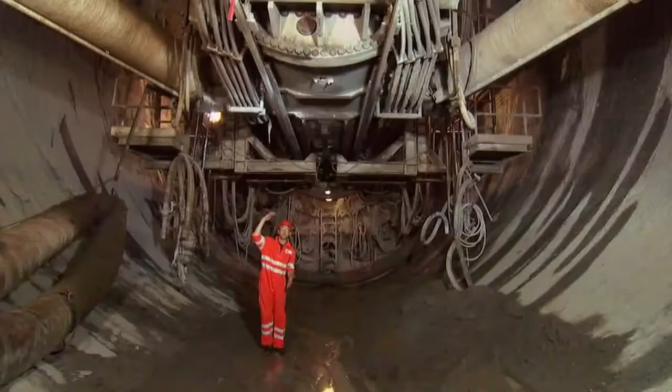On the one hand, tunneling with one of the biggest machines ever built, a 30-foot tall drill bit that is mining right through the earth. And on the other, blasting through 7,000 tons of rock each day. All right, so the charge is in, and we're gonna blow the crap out of this wall.

After 12 years and 34 miles of digging, they're just 4 months away from the final breakthrough, revolutionizing transit through the Alps forever.

I'm in Switzerland, famous for its handcrafted timepieces, milk chocolate, and political neutrality. But more importantly, Switzerland is the geographic epicenter of Western Europe. Two-thirds of all freight sent between Northern Europe and Italy is transported through this tiny country, just half the size of the state of Maine.

But despite its convenient location, Switzerland is a geological anomaly. Over 65% of the entire country is covered by the second largest mountain range in the world, the Alps. With soaring peaks over 15,000 feet high, the Alps form a 700-mile-long barrier between northern and southern Europe.

At present, the only way to get from one side of the country to the other is up and over the mountains. To scale the Alps today, trains climb over 5,000 vertical feet, slowly weaving through sharp curves at just 40 miles an hour, a quarter of their top speed. This steep route also forces trains to operate at half their capacity, despite freight demands growing by 75% each year.

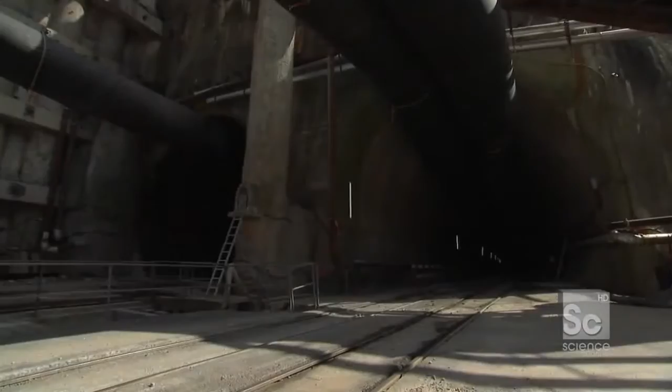Switzerland has launched the most ambitious tunneling project ever attempted, 6,000 feet under the Alps. The Gotthard Base Tunnel will be the longest in the world, stretching 36 miles from one side of the Alps to the other, more than 4 miles longer than the tunnel connecting England to France.

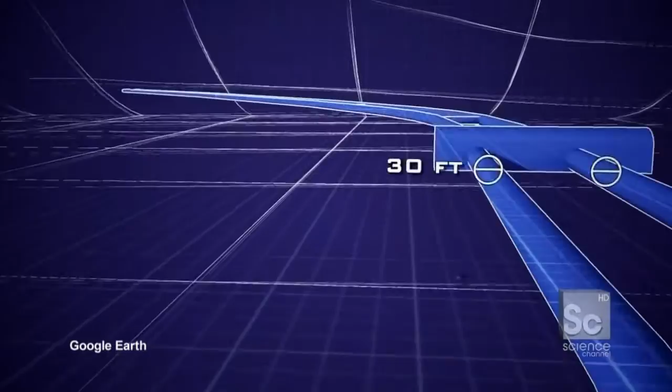When complete, the tunnel will consist of 2 parallel tubes, each 30 feet in diameter. Soon, high-speed trains will cut straight under the base of the Alps for the first time ever, doubling the current freight capacity and dramatically changing transportation through Europe.

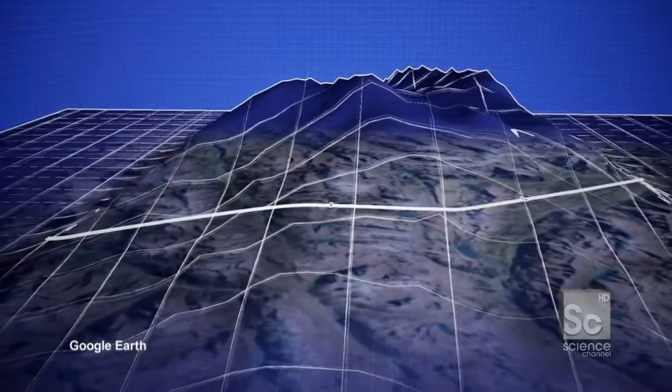I mean, it's more than just making freight move more quickly. Exactly. Alps and mountains are part of the Swiss identity, but it's something that blocks us from the south. And for centuries, people have looked to have a fast way through the Alps. And it's not only about transportation, it's also a cultural exchange.

It brings regions together. To build this revolutionary route, 2,000 workers have excavated 24 million tons of material, enough to build the Great Pyramid in Egypt 5 times over.

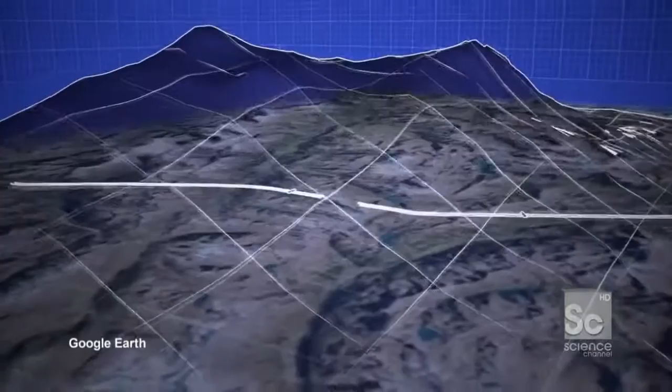After 12 years and 34 miles of digging, the tunneling teams have just 2 miles left to go. They'll meet up under the deepest part of the Alps, 6,000 feet below the surface. And today we're headed 17 miles from the southern entrance, where one team has encountered some of the hardest rock on Earth.

Now we're about to begin a 45-minute journey in that train, deep into the tunnel, the very active edge of where the tunnel's happening.

It's kind of freaky, really.

Okay, and we're off. Tell me about where we are in the tunnel relative to where we are in the mountain. We're now basically under the main ridge of the Alps.

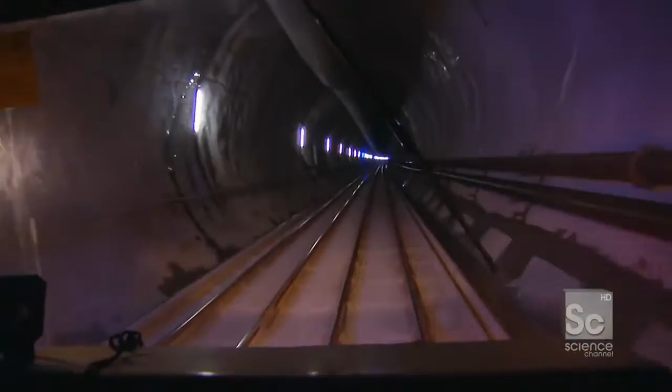The pressure from the mountain overhead creates one of the toughest rocks in the world, granite. Six times harder than concrete, it's what's slowing down the tunneling team.

So the length of the tunnel, the height of the Alpine mountains, the rate at which you have to build that, all of that has come together to create a situation that's unprecedented for tunneling. Yes, the challenges that we had here on this project will actually probably never happen again.

No one's been at these depths in the Alps before. No, I mean, we never know where we're going. We're like astronauts. We're putting our foot every day on a rock where no one has ever been before.

Well, after about a 45-minute train ride, it's time to go to work. All right, we're here.

Although it's a little hard to tell, and it looks like I'm on some big metal rig, this is the TBM, the tunnel boring machine. This thing is 1,200 feet long from the back to the front. Essentially, this is what it's all about: a 30-foot tall drill bit that is mining right through the earth.

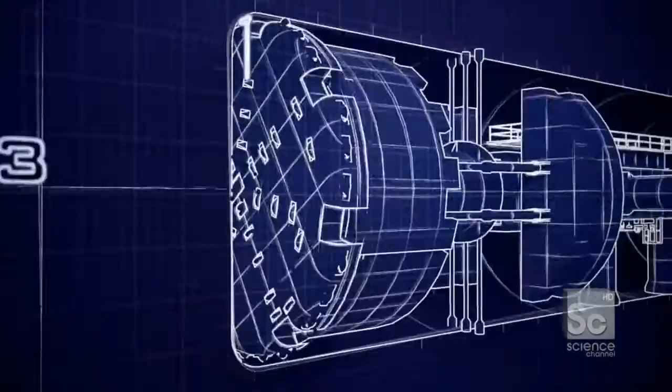One of the biggest machines on the planet, the TBM is a 3,000-ton drill as long as 4 football fields. It bores through the mountain with a 30-foot-tall rotating cutter head that pushes against the tunnel face, crushing the rock, advancing the tunnel an average of 90 feet a day.

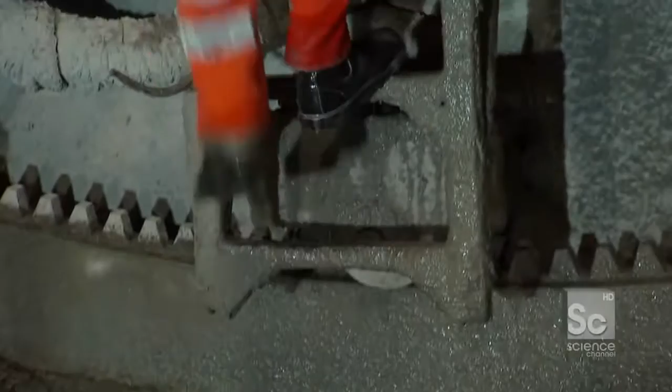Now I'm actually inside the chamber, directly behind the cutter head, and if you look right over here, those are the cutters. Those are the actual rotating devices that are making physical contact with the front of the tunnel.

The 66 disc cutters located at the front of this TBM shear off more than 7,000 tons of rock each day. They've been boring through the granite for 18 hours straight, and they've become worn down. If the sharp edges are worn more than an inch without being changed, it can slow the TBM from a maximum of 120 feet a day to just 9.

The crew has to repair this battered cutter head before they can continue drilling. The question is, have they been worn out? Do they need to be replaced? And the man who can figure that out is Martin.

Martin, give me some skin. Martin is from Germany, doesn't speak a lot of English, but we're gonna make this happen because we're both now 6,000 feet under the Alps. There's not really a lot of time to try and have a cultural exchange.

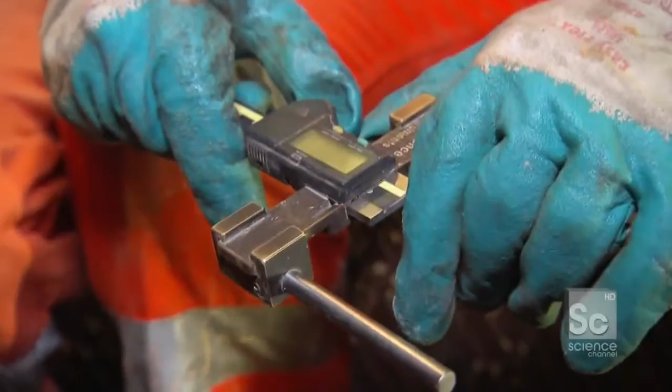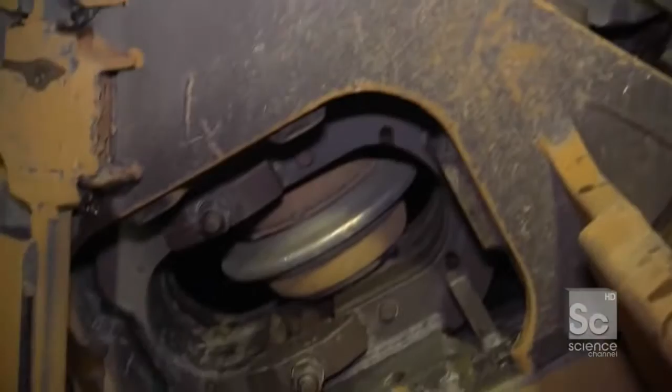So this is our machine here. Martin uses a specially designed caliper to measure how much of the cutter has been eaten away. If the reading is more than 25 millimeters, the cutter's been worn down too much and has to be replaced. Myself and Martin are going to climb into the cutter head, 30 feet tall, measure all 66 cutters, and find out what has to go and what can stay to get this machine back to mining.

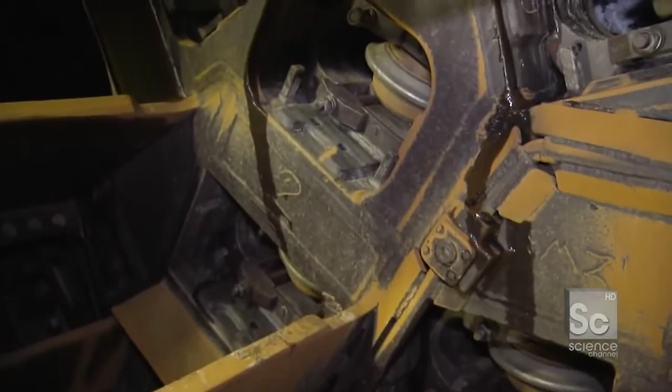Not much below me. Good. The cutter head is as tall as a 3-story building, pushing through the granite with 26 tons of force. Look at him down there. The cutters wear down after less than 12 hours of drilling, 10 times faster than in softer rock.

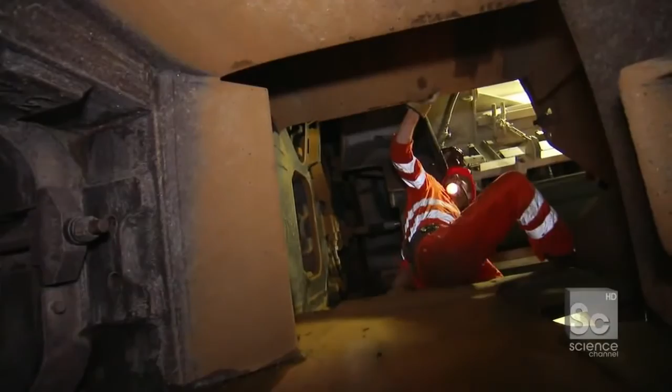Fine, you're good? We're now in the bottom of the cutter head. I'm actually at the very underside of this 30-foot disc. And what we're here to check out is right there. There's the cutter right there, Martin. So let's measure this cutter head.

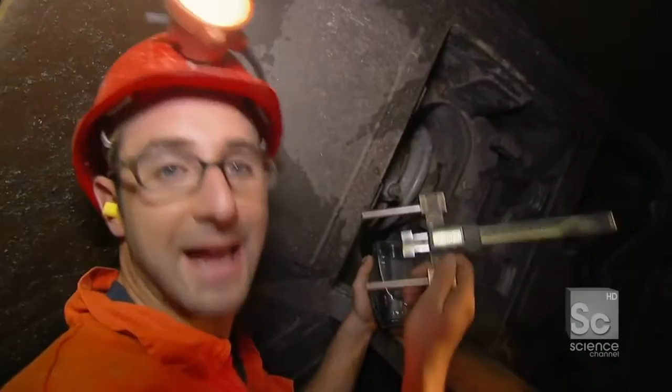All right, so now look, as the caliper extends, this is the whole point here. We look at that number, it's 18.3 millimeters, which means this cutter head of the 66 can remain. Onto the next cutter. How much? 4.8. 4.81, so we like that. That one's good. Next.

7.1. 7.1. Also an opportunity for joy. Ah, that's okay, it's pretty good though. Good, happy. This one's good too, very good. I guess when you're dealing with 66 different cutter heads, it's hard to get excited after each and every one. After measuring, we found that 3 of the cutters need to be replaced before the TBM can get back to work.

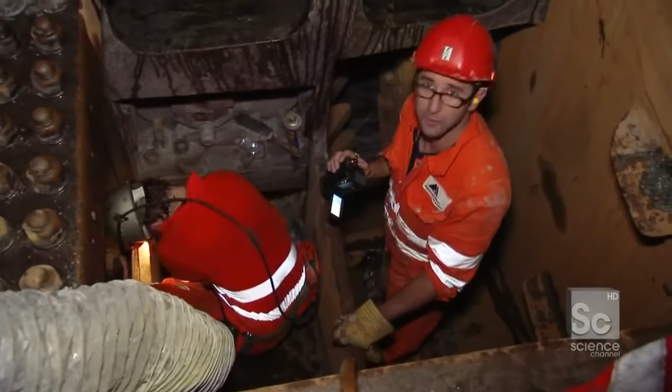So essentially what Martin's doing right now is taking out the old cutter head. Here it is, there it is. He's got it. There goes the old cutter.

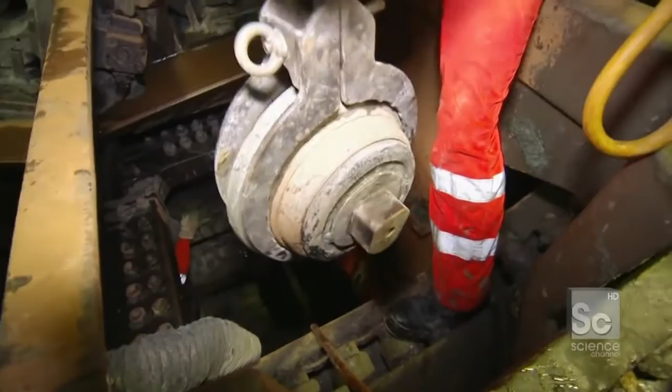Over the course of the project, Martin has replaced more than 10,000 cutters. Each one is made of 300 pounds of solid steel, so the crew uses a hydraulic crane to maneuver them into position.

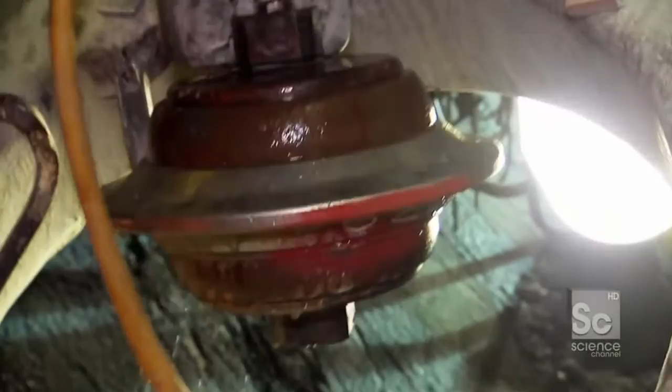All right, so this right here is the cutter. You'll notice the steel is at its full length, so this is the new stuff. Gotta get the old stuff out. It's basically like changing a tire. A very heavy tire, you know what I mean?

So we've swapped the old one out. Next step is bringing the new one. Now it's about getting it to fit in the hole, which seems to involve Martin's feet. There it is, nice. So he's generally gotten into place.

He's now using a pry bar to wedge it over. The cutter is specifically designed with just 2 bolts, for fast installation even in awkward locations.

Now Martin's shooting. Martin is fully making the show by himself now. He's photographing his own work. Pretty good stuff. Martin, as far as I'm concerned, you shoot it, and then I'll do all the work.

It's incredible that there's 66 of these things, and you can imagine they're getting worn down constantly. This is what it takes to just change out one cutter in one unfortunately inconvenient location.

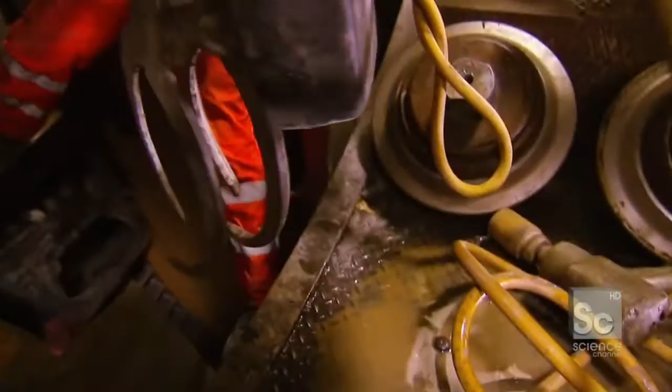All right, so the old one was taken out. New one is in. Finished? Let's finish. You did good, you're a fast man. Now, thanks to his nimble hands and perspicacity, this cutter head is ready to get back to work and start building this tunnel again.

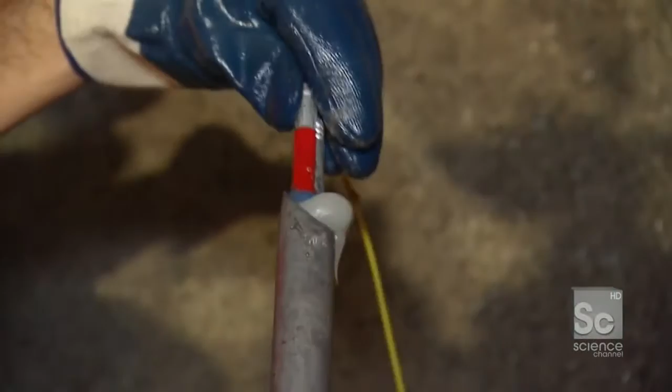Coming up, using 1,000 pounds of explosives. This is like full on, should I cut the red wire or the white wire situation, to blast through one of the toughest mountains on Earth.

The Swiss are known for being incredibly precise, whether it's their handcrafted timepieces or their famous train system, which, by the way, I can personally tell you, departs and arrives exactly when they say it will.

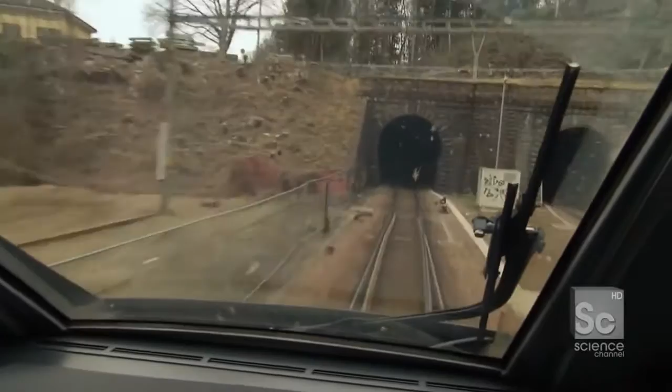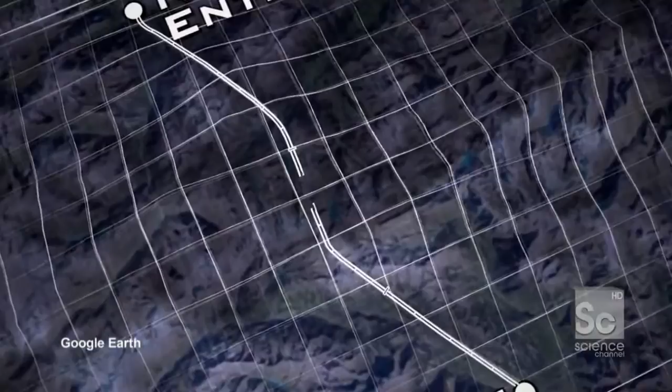And they're going to need that level of accuracy, because the tunnel they're building is not just the longest in the world, but it also has to accommodate some of the fastest trains ever built. Trains will pass through the Gotthard Tunnel at over 150 miles an hour, and at these speeds, even slight curves could cause a derailment. For tunneling teams on either side, this means digging a direct route through 36 miles of rock and meeting at an exact point 6,000 feet under the Alps.

How accurately do you need to be? We have a tolerance of 12 centimeters, which is this much, that we can use to meet. It's like a bow and an arrow, and you don't see the target, but you still have to be right in the middle point. It's incredibly close, and you're shooting an arrow essentially blindly over a trajectory of miles. It's about 1.5 miles still left, yes.

And what I find to be so amazing is that you have a set beginning point and a set end point. If you encounter some bad geology halfway through, it's not like you can go around it. No, you have to go right through, and that's the main goal of this tunnel. You cannot change the geology.

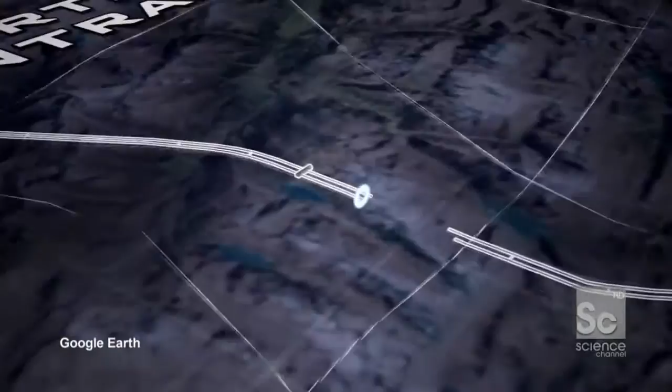Ideally, 2 tunnel boring machines would work towards each other, meeting in the middle. But on the north end of the tunnel, the drilling team has hit a patch of soft rock with fault lines. If they bore straight through, it could crush the TBM. So they had to resort to an older method of tunneling.

Of the 36-mile-long tunnel, 90% of it is drilled using a TBM, a tunnel-boring machine, that can bore through as much as 75 feet each and every day. But for the area where I'm standing right now, this 10% section, there are so many fault lines, it's too dangerous to use a TBM.

So instead, they're kicking it old school and drilling and blasting. Blasting away the rock is 10 times slower than using the TBM, but it's the only solution that'll work in this volatile area. The mountain's enormous pressure creates a squeezing effect.

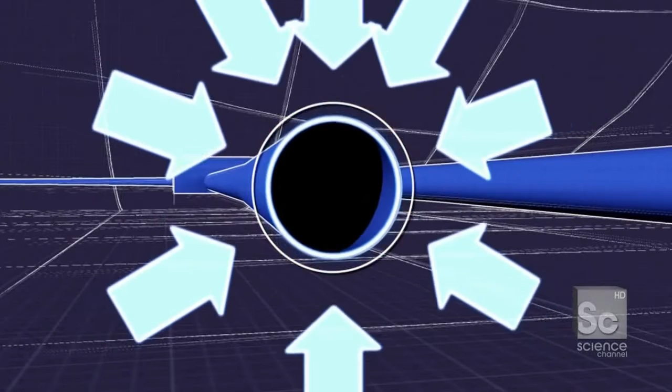Shrinking the tunnel's diameter by almost 3 feet, making it too small for future trains. Now to prevent this, they're blasting a 3-foot wider diameter tunnel, allowing the rock to naturally squeeze down to the right size, matching the other side.

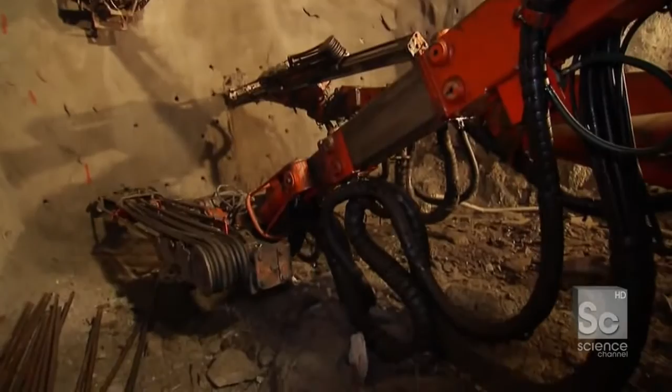So this thing is called a 3-boom Tamrock. Essentially, 3 different drill bits that can put as many as 120 holes into that wall. These holes are filled with ammonium nitrate, a liquid explosive that blasts away the rock, advancing the tunnel 9 feet at a time. Coming up.

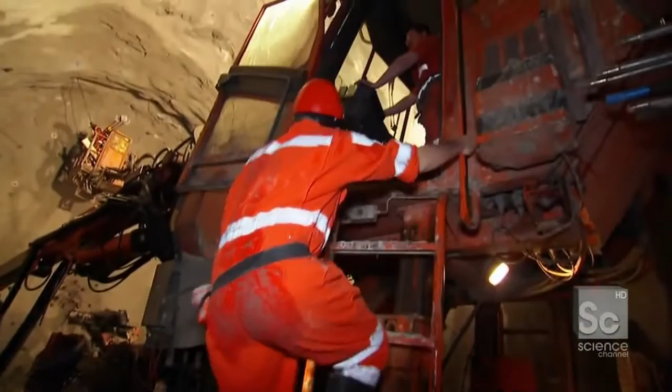Okay, so now I'm inside the cab of the 3-boom Tamrock, and it's this thing and this man right here that are actually driving this thing and supporting this rock face. How are you doing? You're smoking. That's good.

Because we're in a confined space in a tunnel with very little air. So you do smoke? Yeah, you're both smoking. Good, it's fun.

If you look here at the computer screen, it sums up what we're up to. This is a cross-section of the tunnel right in front of us, and the goal is to locate 120 holes on this face and drill those holes, filling each one with explosives so we can push that wall out and grow the tunnel.

Are you smoking back there? This guy loves to smoke.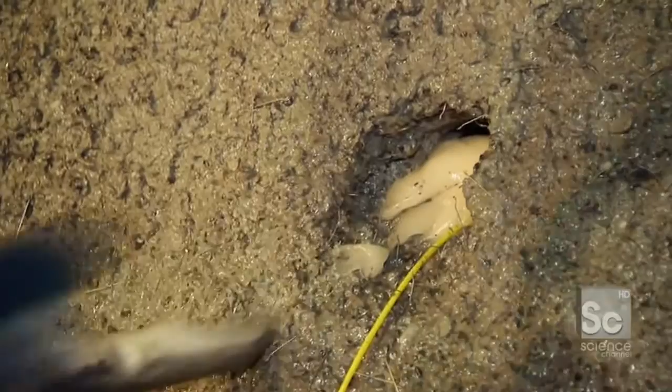There she is. All right, so the charge is in. We're going to blow the crap out of this wall. Keep going, all right, okay, here we go.

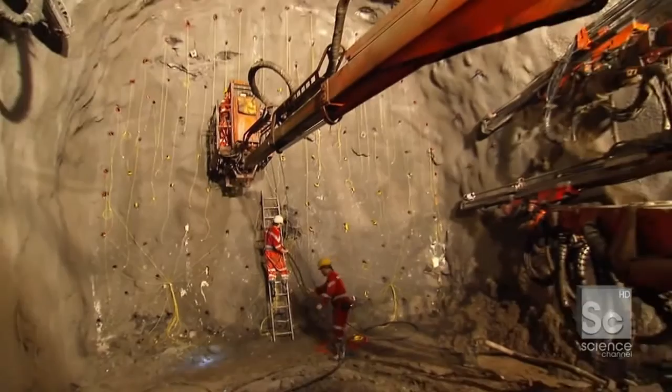The charges are tied together and timed within milliseconds for maximum control, starting at the center and radiating out. The last charges to explode are at the bottom of the face, loosening up the pile of debris, making it easier to remove.

The last thing to do is take the fuse that's connected to every single one of the holes and connect it to this right here, all the explosives getting tied together with this last piece of, well, yellow electrical tape. You would have thought it'd be a little more sophisticated at this point, but that's it.

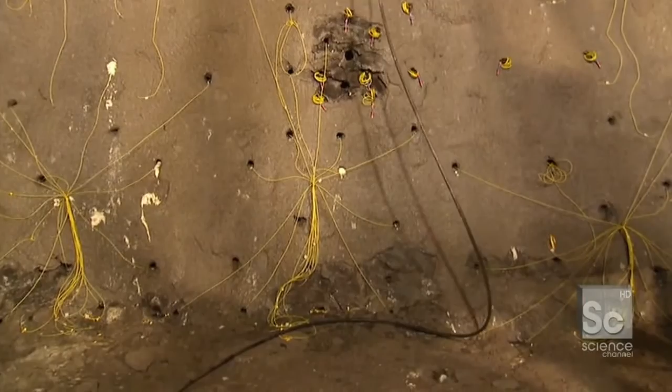With the fuse connected, the explosives are live. The team retreats 900 feet up the tunnel to clear the blast radius. When the multi-million-dollar equipment starts getting backed out of the way, you know it's time to go. All the holes are filled, charges are connected, we are done, everyone's evacuating. We're ready to blow this thing up.

All right, so we're going to hide behind this steel container right here. Now, there should be enough protection, but I want to make this clear: the blast is happening right over there in a straight line. That's it down there, that's the end of the wall. So we're not down a corner, we're not hiding far away.

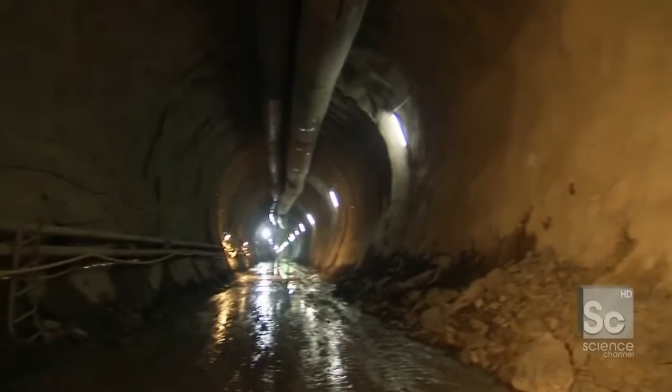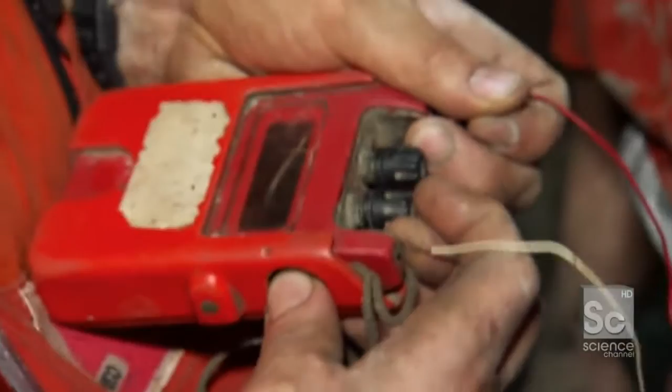There are just over 100 blasts to go before the tunnel is done, and the honor of setting them off goes to the construction company's largest shareholders. As we speak, in his hand are the two wires that came all the way from that wall, physically dragged all the way there. He's tying them into the detonator, one to the next. This is like a full-on 'should I cut the red wire or the white wire' situation. There are about 14 different people from the company to my left here.

He did a fantastic job. The blast went off, all is well. Potentially the rock wall has been pushed back 9 feet, and I'm gonna start buying stock in this company, so in a couple of years, if I stay focused, I too can blow something up.

The blast puts off superheated ammonia gas, so we have to wait 30 minutes for it to clear before we can check the damage. There's still a lot of residue in the air, so your eyes do burn. Even with the gas mask, it's really hard to breathe. You can feel the ammonia in the air.

Well, what do you think? Tip top, tip top, tip top. Good? The man is happy.

It'll take the remainder of the day to shuttle all 6,000 tons of debris 5 miles out of the tunnel. Well, look at this. Where I'm standing right here, 15 minutes ago, was a solid wall of tunnel. And now, I'm standing on the residue. The tunnel has been grown, pushed back by 9 additional feet. And they're gonna spend the rest of the day pulling out the muck and getting ready for the next blast.

Coming up, preventing a catastrophic cave-in with a one-of-a-kind technology. Yeah, it can collapse and fall down, and that's a great problem. That's a big problem. Yeah.

So I'm now driving through the Swiss Alps, one of the largest mountain ranges in the world. And it's complicated. I'm climbing over 5,000 vertical feet, and to do that, you have to negotiate these incredible curves, one hairpin turn after the next.

For more than 800 years, people have been searching for a faster route through the Alps, but it just wasn't possible until now. Because to build a tunnel straight through these mountains, engineers had to overcome some of the most complex geological conditions in the world.

Generally speaking, land masses are formed by a series of earthen deposits, one on top of the next, for millions of years. This creates a horizontal stratification of layers. Now, as you can imagine, this is great for tunneling. The TBM goes in on one side and has the same consistent rock type all the way through the tunnel.

However, here in Switzerland, things happened a bit differently. When the tectonic plates made contact, they actually folded upwards, creating a series of vertical stratifications, which make an amazing mountain range, but also make a lot of different geological types. So when the TBM goes into the mountain, it hits one type, and then a second type, and a third and a fourth and a fifth. Multiple different problems requiring multiple different solutions.

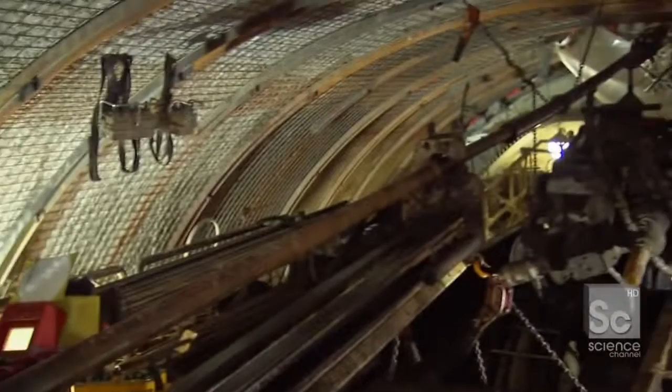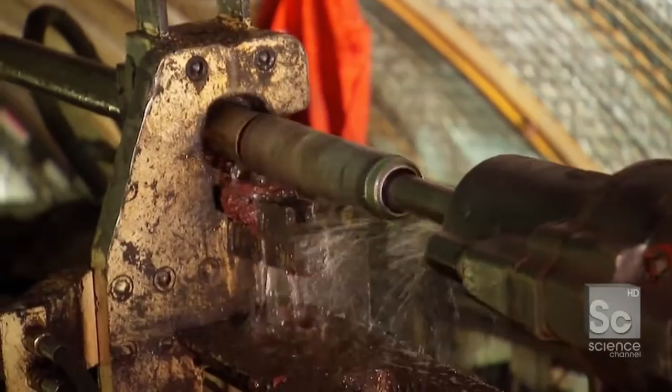So instead, they're doing a probe, using something called the exploratory drill. The drill literally feels its way through the rock 360 feet in front of the TBM to find out if it's hard or soft. If the rock is too soft, there's a high chance it can cave in while drilling, burying the $30 million TBM and the men working on it thousands of feet below the Alps.

For example, if the drill steel goes right into the rock very quickly, you know it's soft. But if the drill steel has to fight its way through, you know it's very hard. We stay also here with our eyes of geologists, not only with digital data, to look at the rocks, how they behave. You have to actually see, feel, understand the rock. Because in reality, you're still working blind. You never actually see the rock, but only see the way in which things interact with it. It's easier today to look at the surface of the moon than to know exactly what we have 10 meters inside this rock mass.

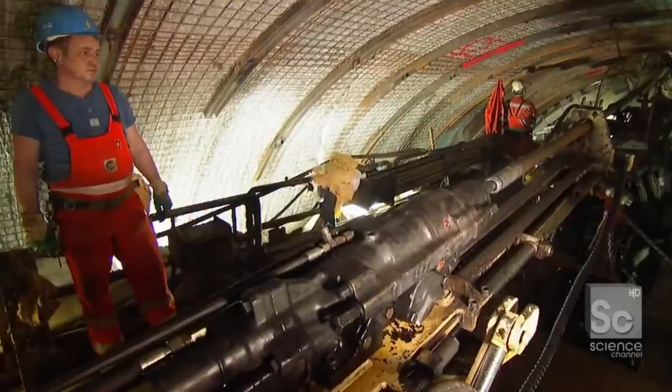To probe 360 feet into solid rock, the drill is made up of 36 10-foot-long sections joined end to end. So what we're going to do is latch that on, tighten it up, lock it in. In doing so, we've added a new piece of steel, creating one long 360-foot probing stick that tells us what's happening out in front of the TBM.

So the man who's actually controlling the drill and the force he applies to each subsequent piece of steel is right here.

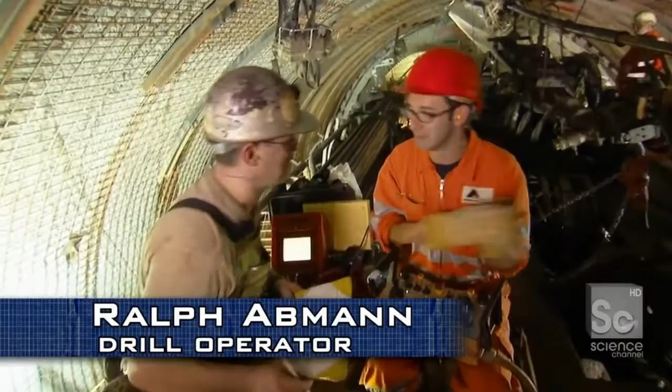Ralph, Guten Tag. Guten Tag, I'm Danny. Oh yeah, nice to meet you. My English is bad, sorry. My German is terrible. Okay. I started and you... Perfect.

Ralph just turned the drill on. He's going really slowly right now to get a sense for how much the rock is pushing back. As he takes his readings, he slowly increases the power. Or lets me drive.

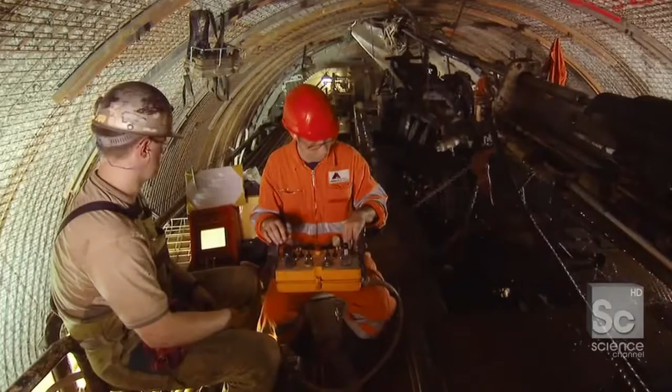A computer records how much force it takes for the drill to cut through the rock, giving geologists a sense of what's in front of the TBM.

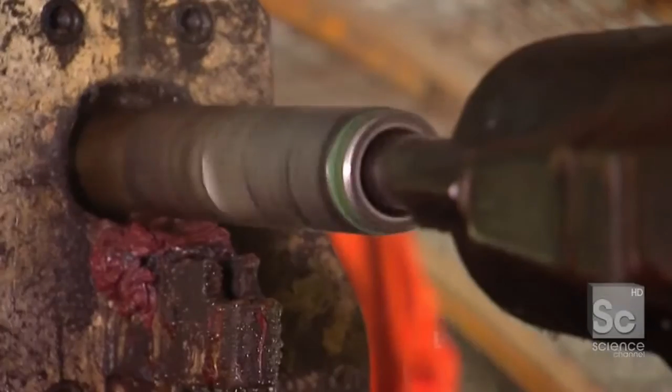About 100 feet in, the drill hit good, hard granite. But it also revealed that the first 100 feet were much softer than expected. If it's too dangerous to drill through, they'll have to stop the TBM and manually blast through the danger zone, adding 5 months and $10 million to the schedule.

So tell me about what was discovered during the exploratory drilling. Yeah, through the drilling we find out some very, very soft material. So now we're very nervous of the situation. If this were soft rock, what could happen? Yeah, it can collapse and fall down, and that's a big problem.

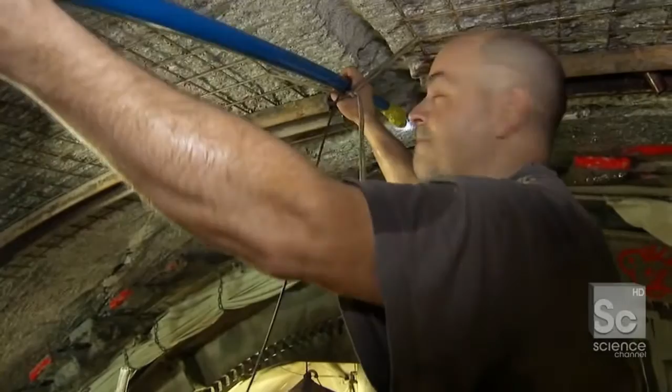To find out if the TBM can safely move through this soft rock, geologists are doing a rare secondary exploration using an endoscopic camera to peer into the mountain. And you don't do this very often. No, but at the moment we have a very special situation, so we use this camera thing. It's just the second or third time ever.

So what do you hope to see by putting the camera in there? We hope to see just a small band of the soft thing, so that would be good, but we don't know.

I mean, essentially, we're giving the tunnel a colonoscopy. Sorry? Oh, that's this one. You know, sometimes when they want to check out your insides, they put the camera in. Okay, that's the rare one. Same thing, huh? Same thing, yeah.

The camera shows the physical structure of the rock, information the drilling can't provide.

So this is it right here. Wow, that's amazing. So essentially, they have an endoscopic camera attached to the end of this blue thing, and they're going to stick this camera in a pre-drilled hole about 150 feet out that will tell them exactly, by eye, what is happening in the rock.

And I've always wanted to do this. That's not the tunnel, that's my mouth.

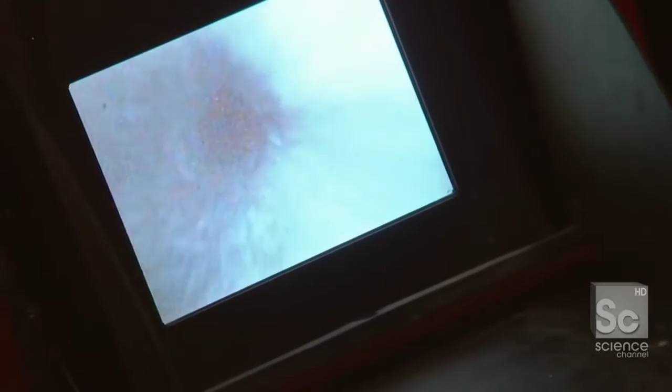Geologists look at the pattern and colors of the rock for clues about its structural integrity. If you look at that screen right now, what you're able to see is exactly what geological condition we're going to experience 150 feet in front of where we are right now.

This is like that scene in Star Wars when the monster came out at the...

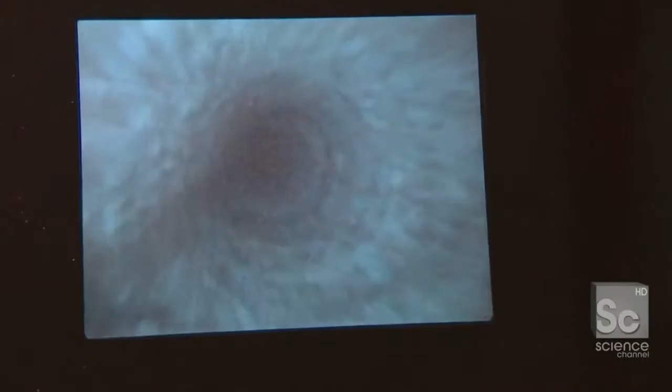That's amazing. So when you look at this image, tell me what you're taking away from it as a geologist. Yeah, what I see is a stone from inside, and you can see the structure, and you can see that it is the same structure as the stone we have in the back of us.

So when you look up, that same kind of black and gray, the same lines you're starting to see just around that edge, like right there, that white fissure right there. That is good news. The footage shows that despite its softness, the rock is structurally sound, and the TBM can safely bore through it to get to the hard rock.

So if this rock is good, that means that rock out there is also good. Yeah, absolutely. So as a geologist, does that make you smile? Yeah, it's mine. That's a good rock. That's good rock.

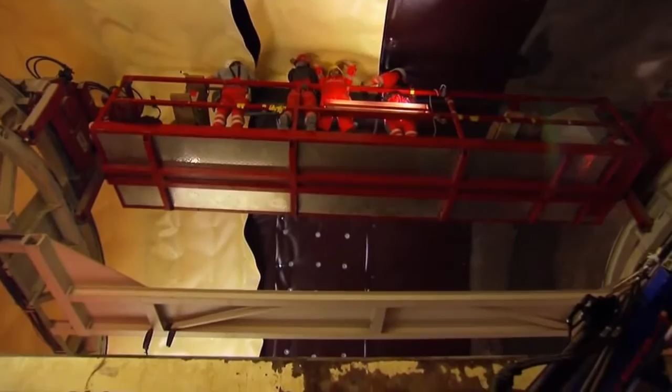Coming up, preventing a major train derailment with a drainage system designed to stop thousands of gallons of water. This can't be the easiest way to do this. But first, who holds the record for the longest tunnel in the world? The answer after the break.

Ah, to be in Switzerland, amongst the beautiful snow-capped mountains, breathing in this incredible fresh mountain air. This is about the last I'm gonna get of it, because today I'm going into the mouth of the tunnel.

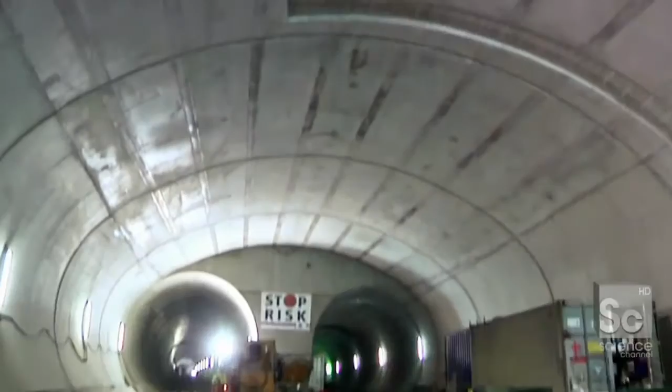The Gotthard Base Tunnel gets its name because it cuts through the base of the Alps, more than a mile below the peaks. While this depth creates a fast, flat route, it also puts the tunnel in danger, not only from the enormous pressure from above, but also from the large quantity of water inside the mountain.

The Swiss Alps, if you think about it, are a waterlogged mountain range. There are lakes and streams up top, as well as snow-capped peaks. And when that snow melts, all that water will slowly percolate through the mountain and ultimately come down into the tunnel, rusting the steel and eroding the concrete.

Over 1,000 gallons of water seep into the tunnel every second. If it's not contained, that water could be incredibly dangerous, eating away at the rock supports, potentially collapsing the tunnel, or rusting the high-speed rails, causing a major derailment. So the challenge is to find a way to take this 36-mile-long hole and make it waterproof.

Gunther, the challenge is the Alps are full of water. Yes, lots of water, I know this, you know this. How do we keep the water from going into the tunnel and rotting out the steel and rusting out the railroad tracks?

With polyethylene. This is absolute security, this is what keeps it dry, no chance for water to come out. This tunnel has one of the most advanced tunnel drainage systems ever made, hidden behind the tunnel's concrete structural wall.

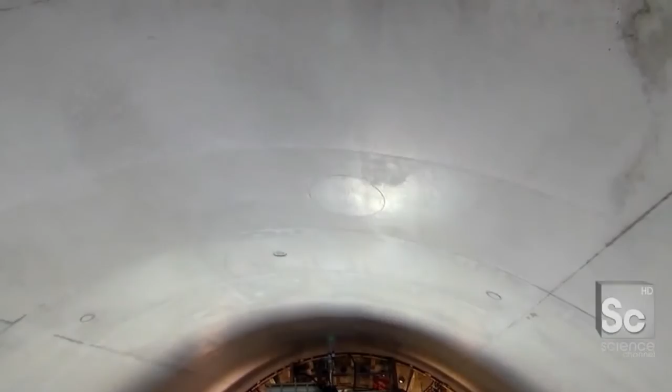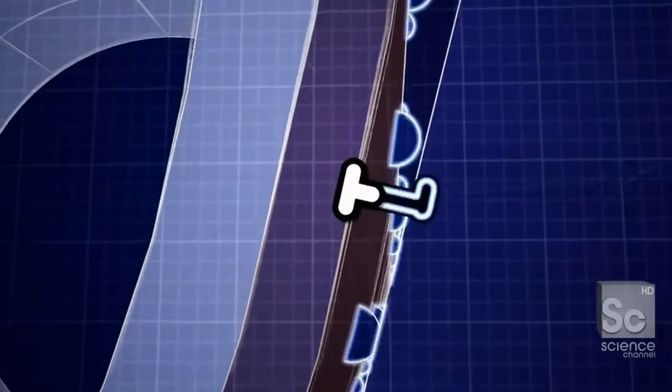A thin sheet of yellow polyethylene actually creates the watertight seal. Under that, a thicker layer of plastic protects the waterproofing from the tunnel's rough walls. Finally, small spacers create a half-inch gap from the rock face, allowing water to flow down into a drainage pipe.

And the key to the entire watertight system is installing it without any punctures or seams. To make sure that it's solid with no seams, holes, or edges, we're going to unwrap this around the entire circumference, in one piece, all the way around.

The layers are made from 100-foot-long sheets of seamless plastic. In total, they'll use more than 50,000 sheets to seal the entire tunnel, enough to reach from New York to Boston and back again. Now, one of the oddest things about building the tunnel is that you're working with an upside-down circle.

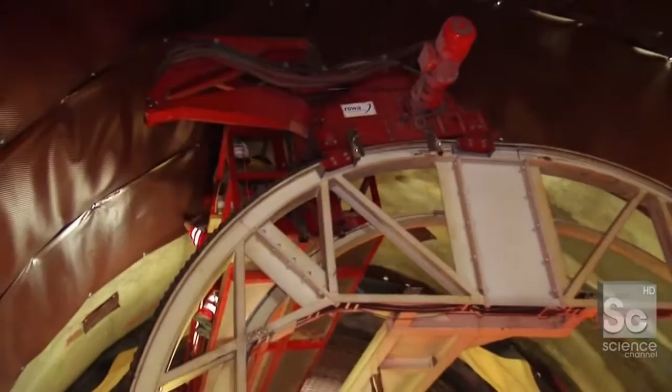And you have to cover every single inch of it. So rather than go up, build some scaffolding, get higher with more scaffolding, they've created this rig that moves 360 degrees around and lets us unfurl these sheets of drainage mat in one single shot.

Oh, coming down, look out. Sorry. The drainage mat is secured to the wall of the tunnel with gray plastic caps. They do more than just attach the drainage mat to the tunnel.

These caps are made from the same polyethylene as the yellow waterproofing, and when heated, the plastic bonds together, seamlessly attaching the waterproofing to the tunnel walls. So what Philip's doing right now is taking a heat torch, putting it on the back of the plastic and melting just a little bit. There's no tape, there's no nails, he's literally melting the two pieces to form one solid bond.

The heat gun, called a hot air welder, melts the plastic at 600 degrees. We're going up top now, huh? Yeah, give me the heat, give me the heat.

So essentially he just put 600 degrees behind me, and now I'm pushing the rubber against it to melt the two into one, and it is burning the crap out of my hand. And we don't stop, we keep moving, we're doing this in one shot. Oh no, my side more. You gotta be kidding me, why don't you guys wear gloves? This can't be the easiest way to do this. That is the easiest way, believe me.

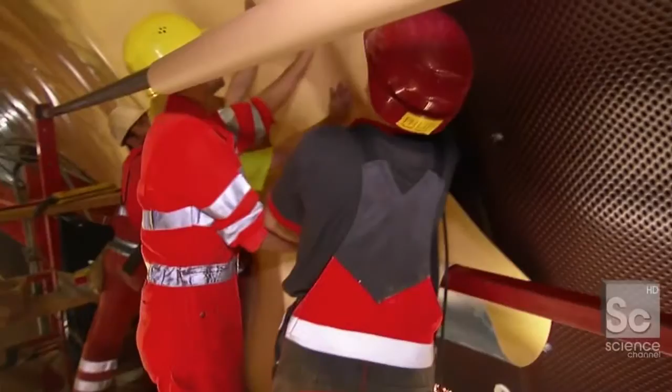Gunther's team can install up to 10 sheets a day. With just 2.5 miles done, it's going to take them 2 more years to waterproof the tunnel.

So now that we've done this, essentially, this section of the tunnel, the longest tunnel in the world, has just become watertight. No chance. No chance? I work here, no chance. You did it? Yes, I did. Gunther said no water's coming in. If you believe anyone on this site, and there are some very reputable people, I would believe Gunther. Gunther? Thank you. Thank you, sir.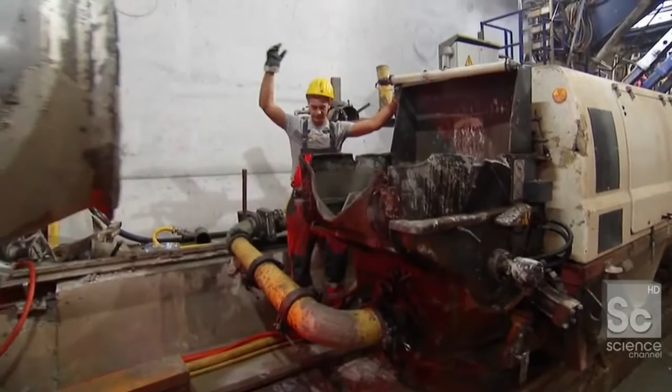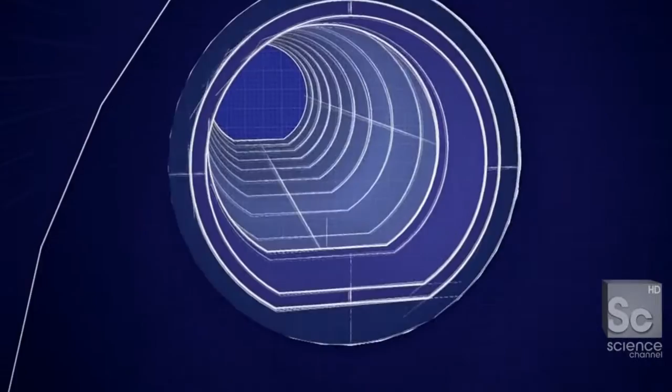The tunnel is now totally watertight. The next step is to give it its strength in the form of a solid concrete cylinder. The way they do that is using this apparatus right here, something called sliding formwork. Basically a 30-foot-long mold, this formwork shapes the concrete into the final structural wall, almost a foot thick for strength.

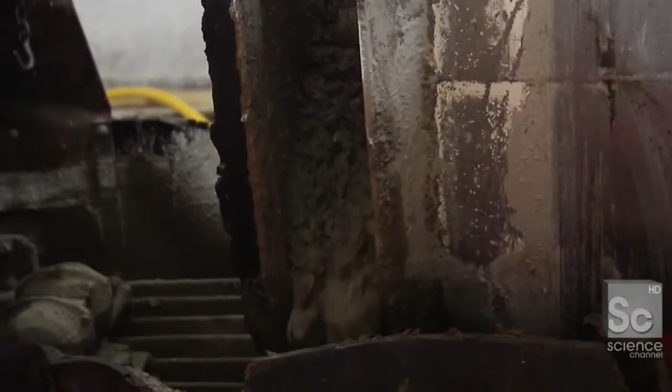All right, here it comes, check that. As he turns that wheel, it's opening up. This concrete is coming out, and we're going to fill the entire circumference of this tunnel, 30 straight feet of it, and that begins right now with this concrete.

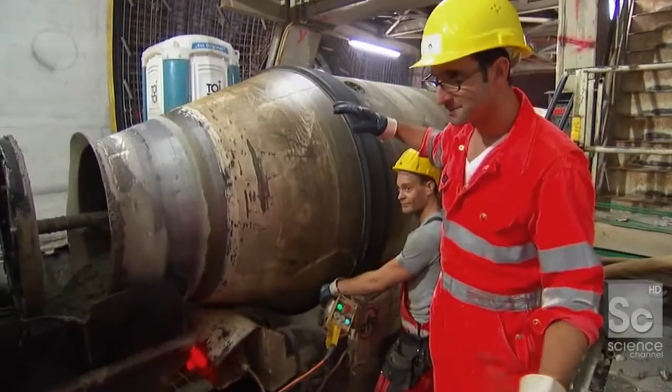Now the concrete is flowing. You hear that, each pump, it's pushing the concrete through this tube, up top, and down into the formwork. I'm going to go head up now, where they're pouring the concrete.

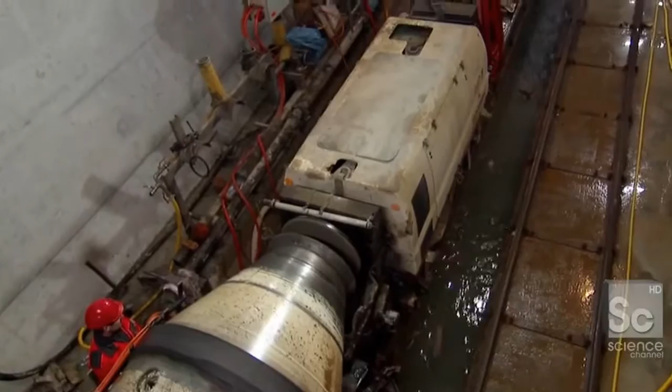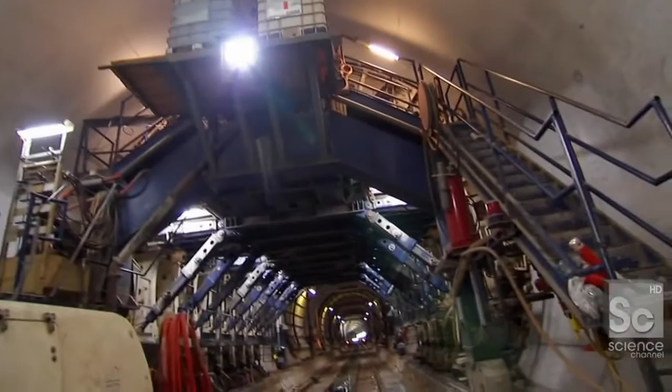The concrete team's biggest challenge is maintaining a uniform density around the whole circumference. If the wet concrete is allowed to naturally settle at the bottom of the mold, the tunnel won't distribute the stresses from the mountain evenly, cracking and caving in. To avoid this, the mold is poured 9 feet at a time and allowed to set for 15 minutes before the next pour, making it strong enough to hold up under subsequent layers.

But if the concrete pours down, you have no access, except for this. They developed a series of windows, or almost portholes, that open up and allow the guys to get inside and actually vibrate the concrete as it slowly rises around both sides of the cylinder. Can I get in there? Can I look? Yeah?

So where I am right now is actually what will become the concrete wall. This is the outer layer, this is the inner layer of the formwork, and as you can see, the concrete is getting poured in and will slowly rise, filling this 1-foot cavity all around the tunnel.

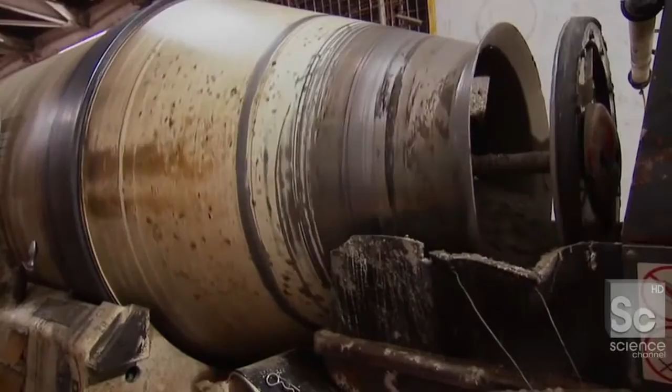This 30-foot section will require over 20,000 gallons of concrete, making a wall strong enough to stand up to the enormous pressure from the mountain above. But keep in mind, that was 30 feet. We have 35 more miles to go to make the longest tunnel ever attempted.

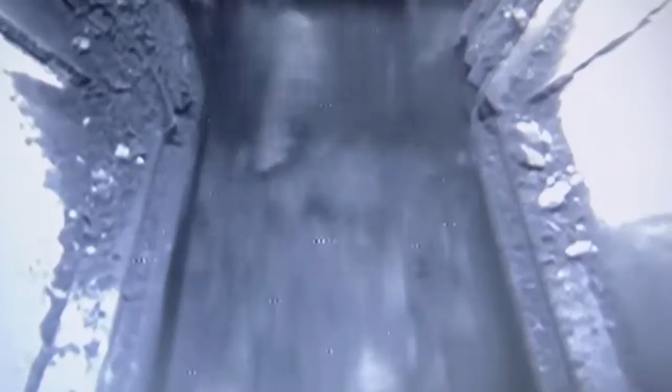Coming up, starting up one of the biggest machines in the world for the final push through the mountain. So if you see this, you're happy. Yeah, super. That's super. Super cool. Super.

The Gotthard Mountain Pass is one of Europe's most important trade routes. And since the 13th century, engineers have been struggling to find a faster way through.

People always tried to improve, actually, ways through the Alps. First it was just horses with freight on their back, then they built a small street, then actually the boom came with the railroad. Even 100 years ago, the desire would have been, if possible, to bore right through the Alps, have a straight shot. Exactly. It's just that in the 19th century, the people didn't have the technology to build such long tunnels.

The technology finally caught up 12 years ago when Switzerland broke ground with their first tunnel boring machine. Now, they're just 4 months away from completing the first high-speed route through the Alps. But the TBM has got to stay on course with surgical precision to ensure a clean breakthrough. 17 miles inside the tunnel, the team is gearing up for the final 2-mile push through the mountain.

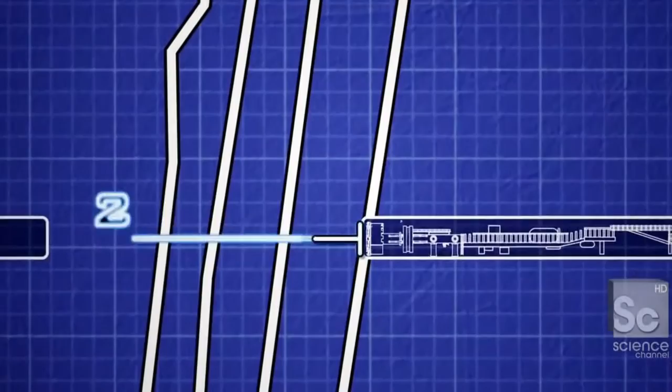Get to ride in the front of the train with who I think to be possibly the happiest train driver I've ever met. You're Felice? You're driving the train. Felice is ready. He is happy and enthusiastic about the endeavor. I am too, not as happy as him. I don't think anybody is, but we're ready to go. Come on, let's do this. I love it. Great, all right, we're going in.

After 16 hours of intensive geological exploration of a dangerous section of soft rock, the TBM team is finally ready to begin drilling. Are we here? Yeah, end of the line.

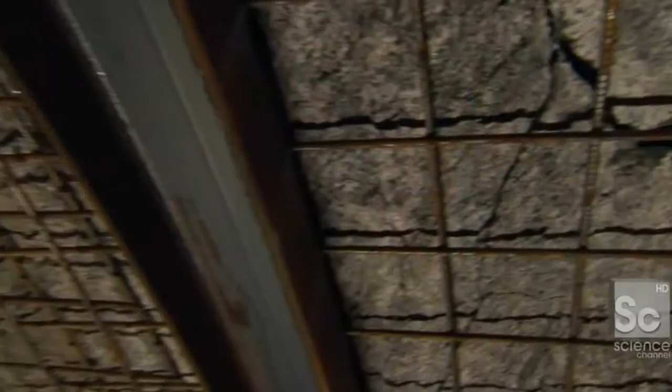In these last 2 miles, the TBM team is facing fault lines and intense pressures from the mountains overhead, making it especially challenging for the driver to both stay on course and avoid a collapse.

Hello, sir. Hello, how are you? Fine. I'm Danny. Yannick. Yannick, are you driving the TBM? Yeah. All of this madness out here, all this driving, and all right here. We're advancing right now.

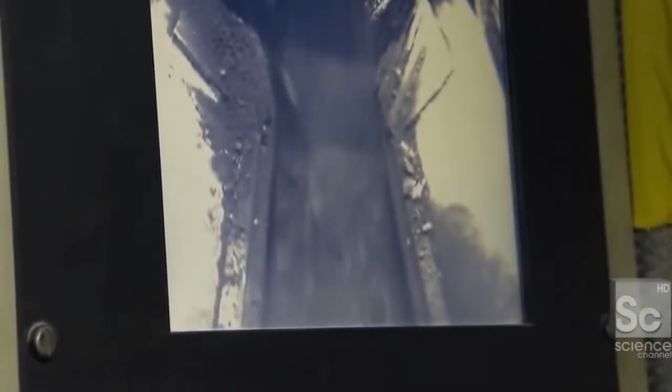So finally, after some time and some very complicated geology, Yannick behind the ostensible wheel of the TBM is smiling because the TBM is mining. We're pushing against the open rock face, and rock is coming out of the cutter head and out of the tunnel. So if you see this, you're happy. Yeah, super, that's super, super cool.

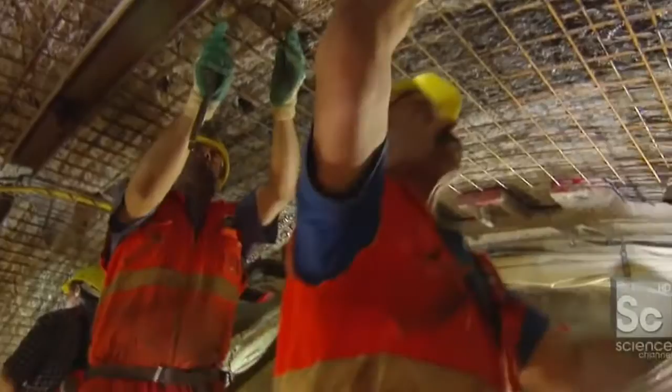As Yannick drives, a team installs metal support beams to keep the tunnel from collapsing. They've got to stay in constant contact to keep the TBM at just the right speed. If the machine moves too quickly, the crew won't be able to put up enough rock supports, leaving the tunnel dangerously weak. This is how fast we're moving, in millimeters. Right now, as we speak, we are moving 49 millimeters per minute, that's 5 centimeters per minute, so that's a very small amount of distance in a minute. This moves very slowly, very slowly.

As he controls the speed, moving less than 2 inches a minute, Yannick also plots the course to meet the drilling team on the other side of the tunnel. A deviation of just 0.05 of an inch, about the thickness of a CD, could cause a misalignment of more than 2 feet by the time they break through. To realign the tunnel, they'd have to shave off tons of material from the existing walls, changing its shape and compromising its integrity. So as we speak, we are angling a little bit to the left and a little bit up.

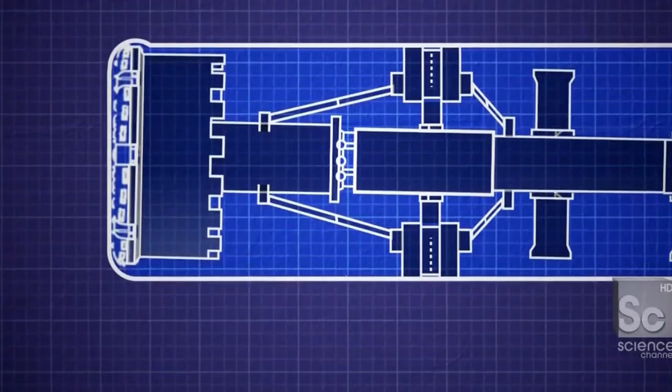During the 9-hour shift, Yannick checks and adjusts the TBM's heading more than 100 times based on real-time laser readings. He controls the horizontal and vertical path with the TBM's 2 massive grippers, which also propel the TBM forward, advancing it 6 feet with each stroke. This moment is perfect, we have good power, good penetration, good travel speed, beautiful looking rock. What more do you need?

Other than maybe not being 6,000 feet under the Alps. But barring that, we are finally in good shape. Yannick jokes that when he's done driving the machine, he's going to New York. You want to go to New York? Well, the good news is Yannick wants to come visit me. The bad news is his method of transport is using a TBM, which at 49 millimeters per minute means he'll come visit me in about 14 years.

After a half-century of planning, Switzerland is just 5 years away from completing the longest tunnel in the world. And if all goes well, high-speed travel through the Alps will be possible for the very first time. Switzerland is famous for the Alps, it is what's defined the image of the nation for hundreds of years. But at the same time, these mountains have also transformed the country into a barrier, disconnecting it from the rest of Europe. So the historical challenge has always been to find a way to connect to other countries while contending with this enormous geological impediment. It's been an 80-year dream to not just get over the Alps, but find a way through them. And after 20 years of design and construction, they have just about made this dream a reality. If you come to Zurich in 2016, you can hop on a train and be in northern Italy in just 2.5 hours, traveling right through one of Mother Nature's biggest obstacles.